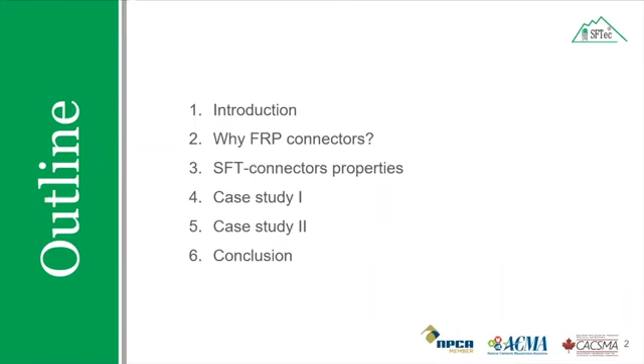Thank you, Rick, for the brief introduction. Let's start with today's presentation. It is a very short webinar on the introduction to fiber reinforced polymer connectors. Through this presentation, I will give a brief overview of the properties of SFT connectors and its applications, and I will go through 2 case studies to elaborate its present uses.

Before starting our main presentation, I would like to introduce our company, SFTec. Our products are mostly designed in Canada and manufactured in China by Sandok Industries Co. Limited, who are specialized in manufacturing of fiber reinforced polymer products. We work with national and international engineering firms, helping them through the design process with fiber reinforced polymer design standards, whether in Canada or the United States. Our focus is on parking facilities, water treatment plants, retaining walls, mainly made of glass fiber reinforced polymers, and also carbon strap applications.

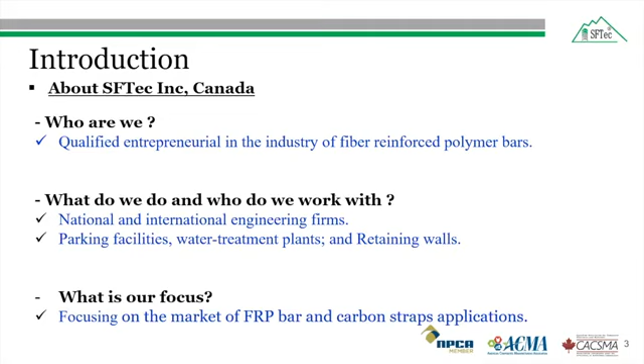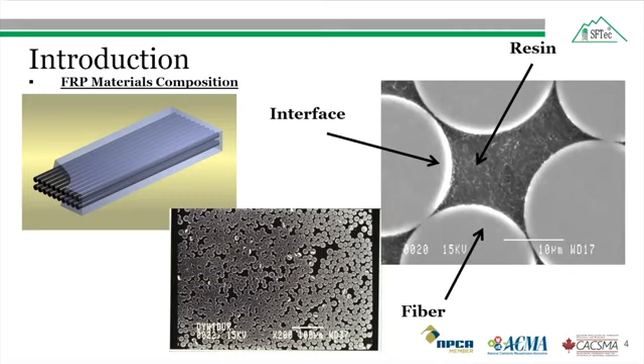The SFT FRP bar is made of composite materials, either fiberglass or carbon fiber. It is manufactured by a process called pultrusion, using a mix of recycled fiber and resins. Here the figure shows a microscopic view of the FRP bar.

There are 3 different types of fiber reinforced polymer bars available in the market. Actually there are 4, but I am presenting only 3 here: carbon, aramid, and glass. The 4th one is basalt, on which research is still ongoing. The stress strain plot shows how these FRP bars compare with steel bars. Two points should be noted: first, glass fiber reinforced polymer has lower strength compared to the other 2 FRP bars; second, the strength of all fiber reinforced polymer bars is higher than steel bars. However, their behavior is linear elastic up to failure.

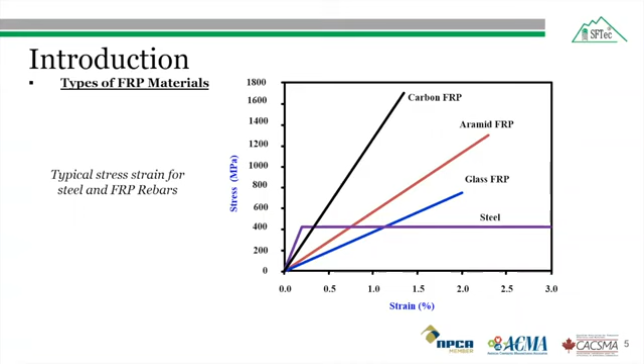In our products, we have different types of FRP products depending on project requirements. Some of the FRP bars we produce are straight bars, spiral and stirrups for transverse reinforcement, bent bars, and glass fiber reinforced polymer shear connectors, which is the topic today. Glass fiber reinforced polymer bar is widely used due to its production cost and better tensile strain compared to other FRP bars. That's why most of our products are made from glass fibers.

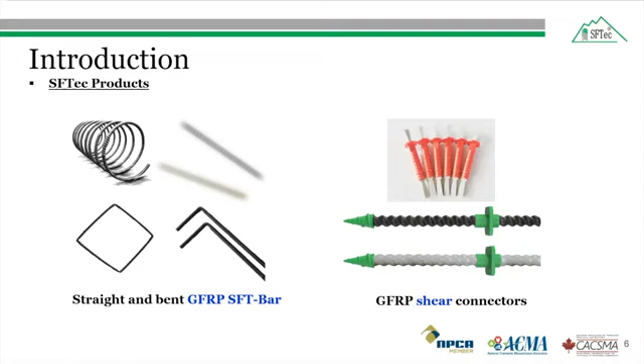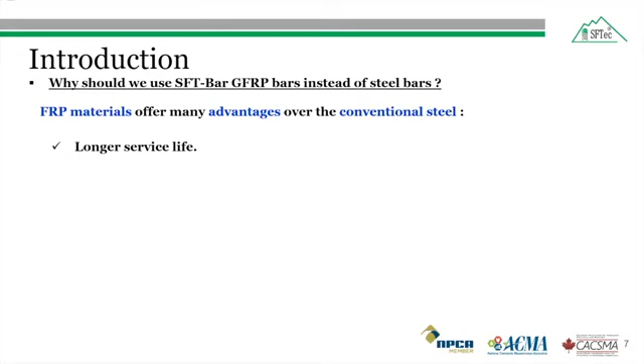Some of the advantages of the SFT glass fiber bar over conventional steel bars: it has a longer service life because of its corrosion resistance, therefore improved durability in harsh marine environments, such as construction near coastal areas in North America's cold climate.

The FRP bars have better resistance against corrosion compared to the steel bars. As I told earlier, the tensile strength of the FRP bars are 2 to 3 times more than that of the steel bar. However, FRP bars are lighter due to the low density compared to steel bars.

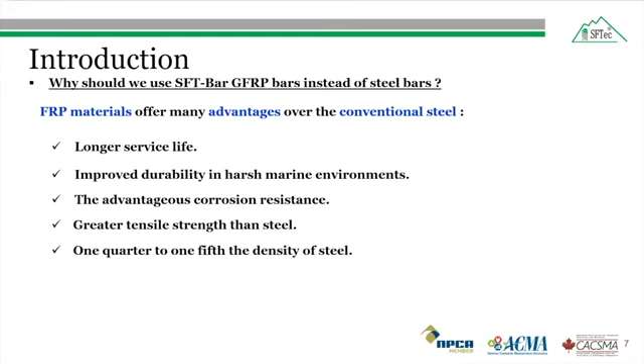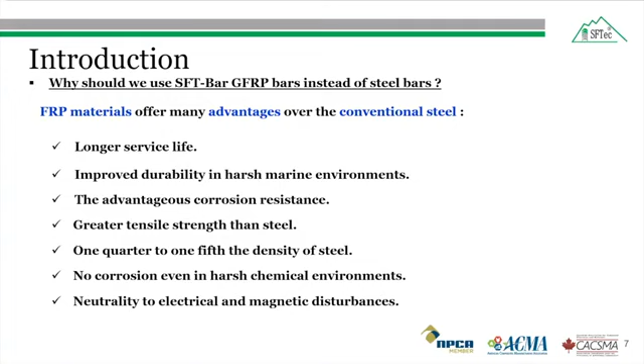Due to the corrosion resistance, FRP bars are good for harsh chemical environments as well. And they are neutral to electrical and magnetic disturbances, making them useful for applications such as airports, military applications, MRI rooms, and hospitals.

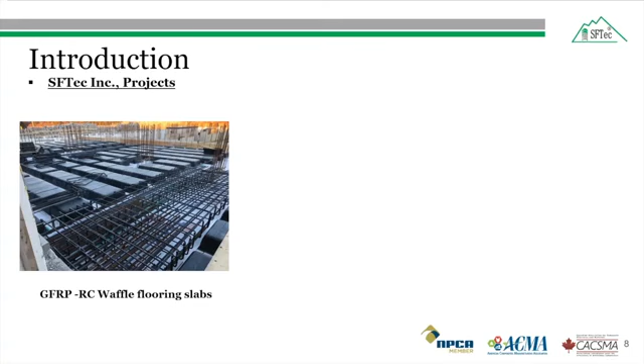Some selected field applications of SFTec FRP bars we have already done in Canada include a GFRP reinforced concrete waffle flooring slab designed with SFTec glass fiber reinforced polymer bar, built last year in Halifax, Nova Scotia. It can also be used for slab on grade. It is a non-structural slab and not a one-to-one replacement, but it saves a lot of money compared to steel bar in terms of labor and transportation.

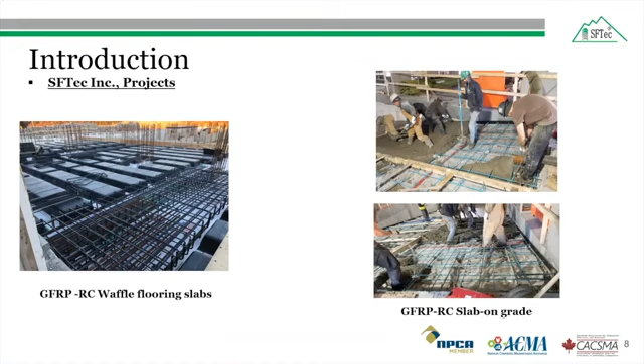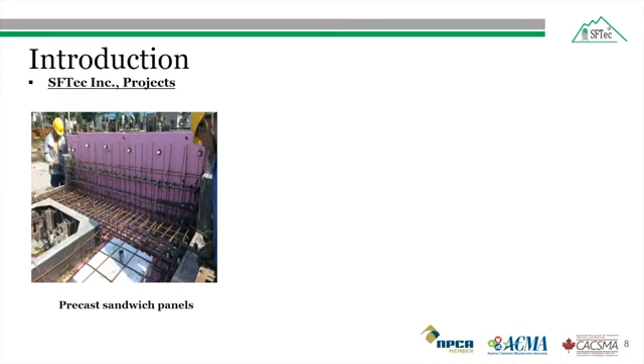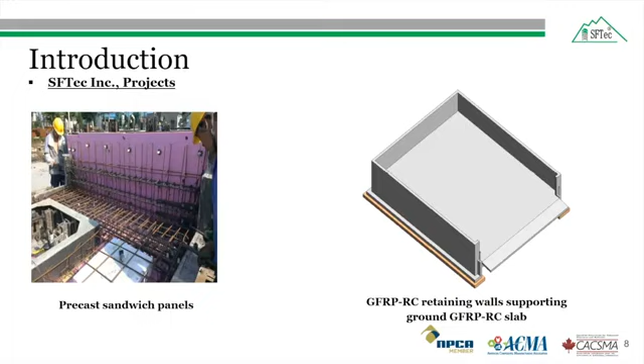On the right is a retaining wall built for the city of Montreal. The retaining wall is designed to dump snow with de-icing salts during the winter. So they built this retaining wall with SFTec glass fiber reinforced polymer bar, which provided resistance against the chemicals used in the de-icing salts.

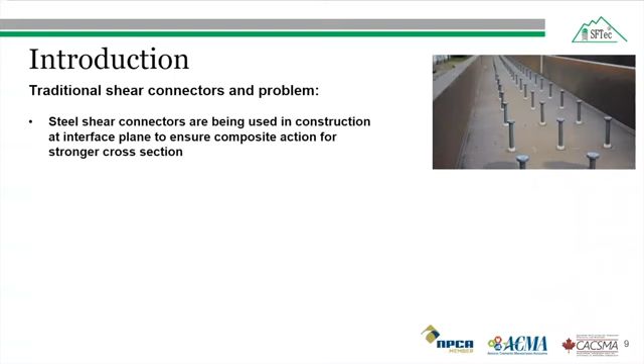Traditional steel shear connectors are being used in bridge construction, also generally called studs, at the interface plane between the cast in place deck slab and the precast girder to ensure composite action for a stronger cross section. But as we know, in North American countries, as the bridge deck slab corrodes over time due to environmental conditions, these shear connectors also corrode and will need replacement.

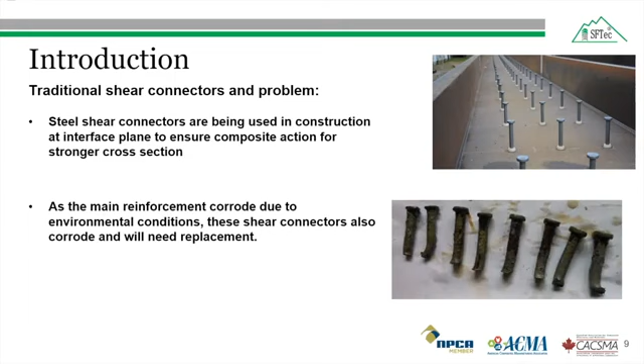This is especially true in Canadian winter, where de-icing salt is used. The corrosion of these steel shear connectors results in gradual loss of the composite behavior and strength of the composite action. So fiber reinforced polymer connectors have shown to be an effective alternative to conventional steel connectors due to their resistance against corrosion.

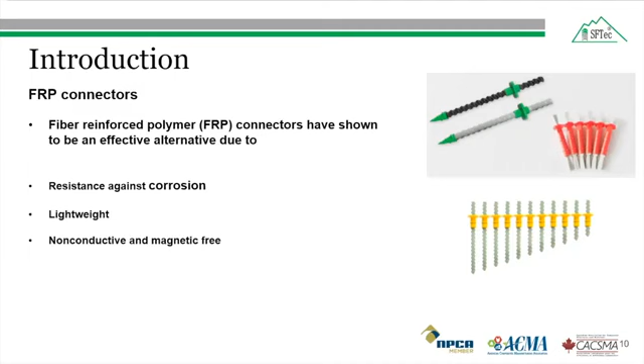It is lightweight and also non-conductive and magnetic free. We'll discuss why the non-conductivity of the FRP is helpful. With SFTec connectors, we have generally 3 different types of connectors.

The type 1 connector is the SFTec thread connector, which has a tensile strength of 700 megapascal, 180 megapascal shear strength, and tensile modulus of 65 gigapascal.

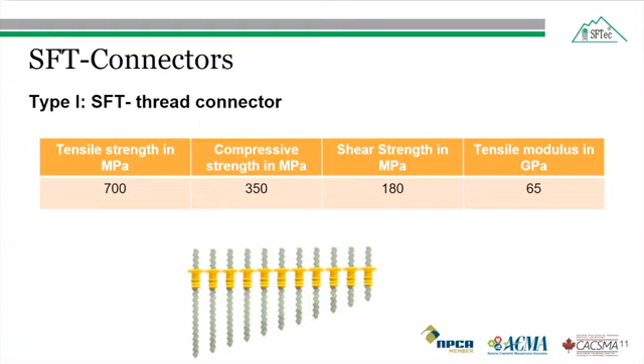The second type of SFT connector is the SFT flat bar, with tensile strength of 600 megapascal, shear strength of 120 megapascal, and tensile modulus of 45 gigapascal.

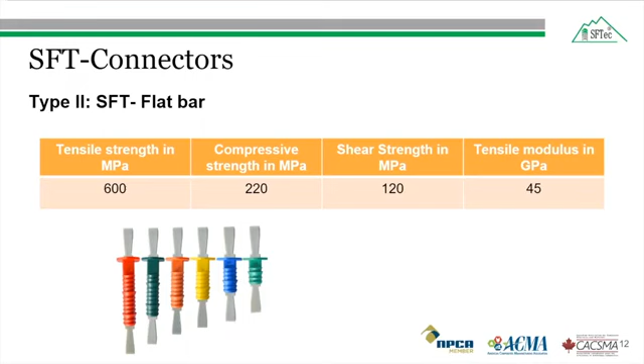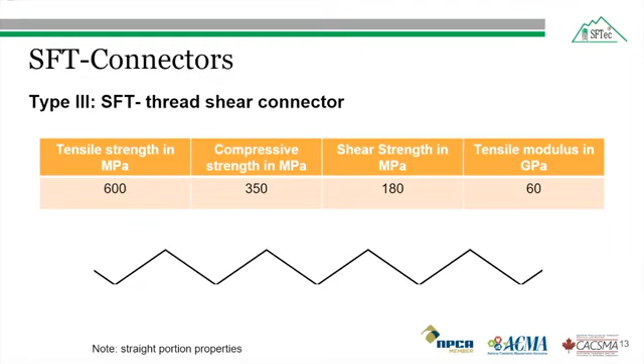Finally, the third type is the SFT thread shear connector, which has a tensile strength of 600 megapascal and tensile modulus of 60 gigapascal. Its structure is like a truss. It is worth mentioning that all the SFT connectors are made up of fiberglass.

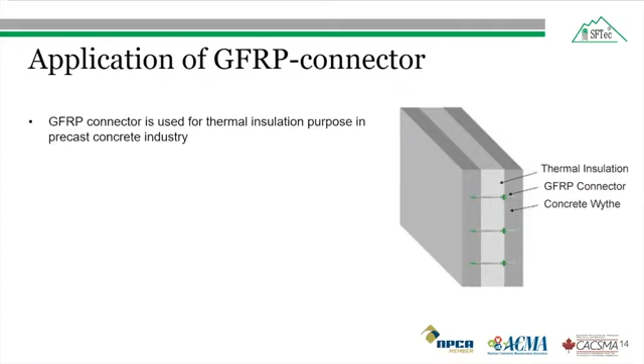The GFRP connectors are used for thermal insulation purposes in the precast concrete industry, such as plant precast and cast in place projects. The precast concrete sandwich wall is composed of an inside layer, outside layer, and thermal insulation. The thermal insulation is generally between the 2 concrete wythes.

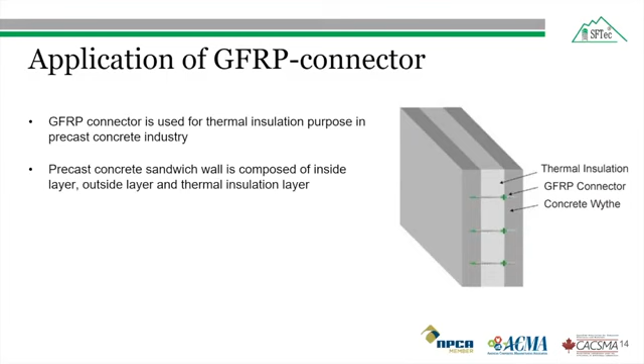And the FRP thermal insulation connectors are used to connect these 3 layers, and they not only bear the weight of the insulation and outside layer, but also can bear the wind load, earthquake load, and other kinds of loads.

There are two cases presented today. One case deals with the thermal resistance of GFRP connectors, and the other with the shear capacity.

The first case study is about the experimental investigation of thermal properties of insulated concrete sandwich panels with fiberglass shear connectors. Increasing economic and environmental costs of space heating and cooling have generated renewed interest in improving the thermal resistance of building envelopes. At the same time, rising construction costs are driving designers to select prefabricated elements, which can be constructed with higher quality control and in less time than traditional construction.

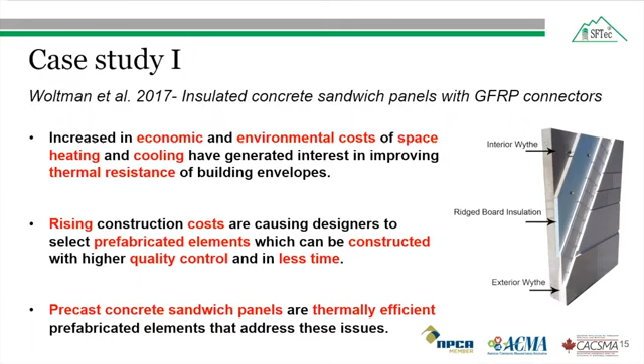Precast concrete sandwich panels, also known as insulated concrete walls, are thermally efficient prefabricated elements that can address both needs. Steel connectors are widely used in the industry, but also have the highest thermal conductivity of the connector materials available. Concrete is also used to connect the wythes in full composite panels; however, a large area of concrete is required, which creates a large thermal breach.

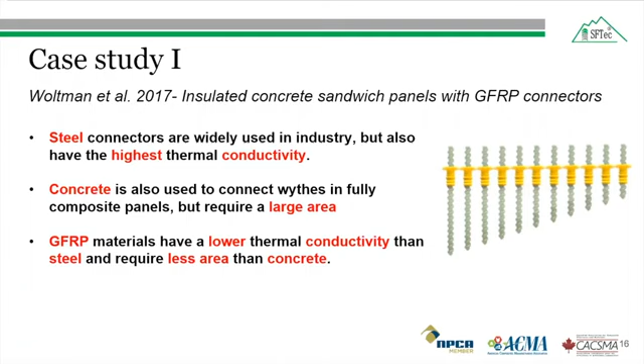Over the past two decades, rising energy prices have encouraged the development of alternatives to traditional steel reinforced design. Glass fiber reinforced polymer, or fiberglass, materials have significantly lower thermal conductivity than steel, generally ranging from 1/60th to 1/30th that of steel, and require less bearing area than concrete to hold the two wythes together. In case study 1, the test setup was a hot box apparatus used to determine the thermal behavior of the insulated concrete sandwich panel.

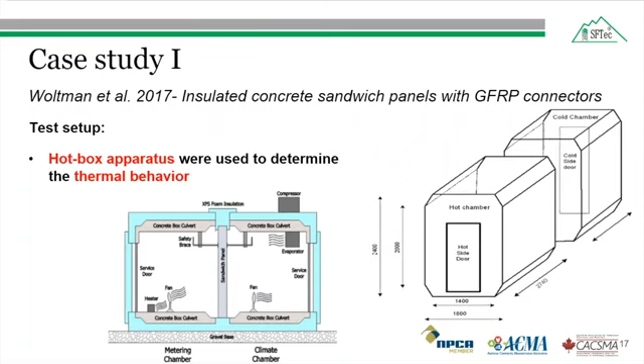The back of each chamber in the hot box apparatus was left open to allow the test panel to be installed. This figure shows how the test panels were installed inside the hot box.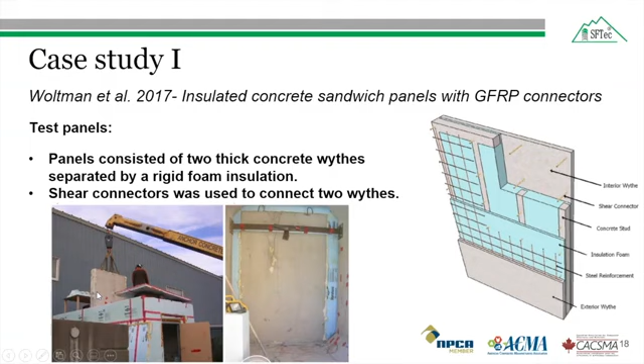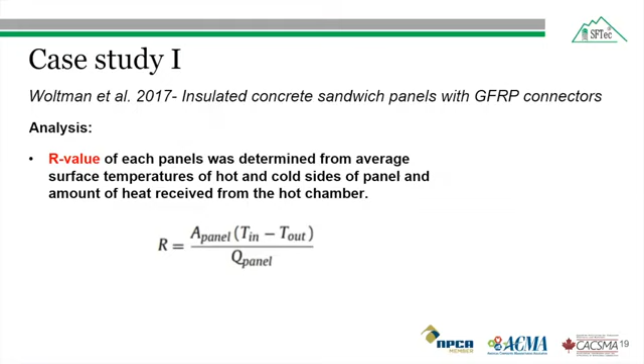The thermal resistance, or R-value, is the ability of the insulation material to resist heat flow. The R-value of each specimen in square meter Kelvin per watt can be determined from the average surface temperatures of the hot and cold sides of the panels and the amount of heat received from the metering or hot chamber. In this equation, A panel is the area of the test panel, T-in and T-out are the surface temperatures facing the hot and cold chambers, and Q panel is the heat received by the tested wall.

Now coming to the results from case study 1: two panels were constructed with similar numbers and dimensions of shear connectors, one reinforced with steel connectors, the other with GFRP connectors. The GFRP, or fiberglass shear connector, panels were found to provide equivalent or better thermal resistance than the steel connector panels, due to the lower thermal conductivity of glass fiber reinforced polymer compared to steel, which minimizes the effect of thermal bridging.

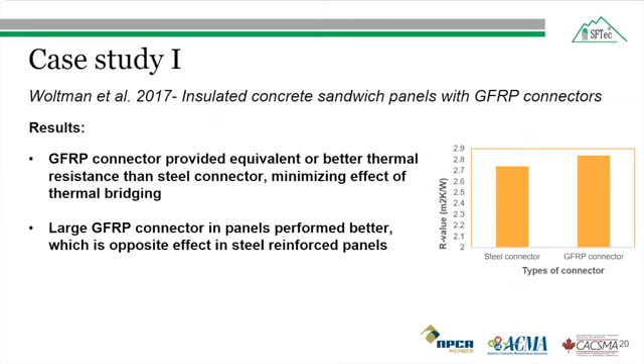The other conclusion drawn from this study was that the large glass fiber reinforced polymer connector panel resulted in a 60% increase in thermal resistance compared to the control panel, which is the steel panel reinforced with steel connectors. This result is the opposite effect of what we expected for steel reinforced panels, as increased connector area of the steel would lead to more thermal bridging.

Now the second case study talks about the in-plane shear behavior of insulated precast concrete sandwich panels reinforced with corrugated GFRP connectors. As I told earlier, insulated precast concrete sandwich panel systems are widely used commercially due to their economic advantages and superior thermal and structural efficiency.

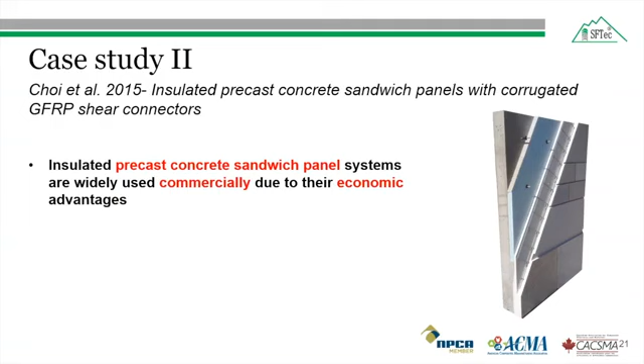As discussed, the panel consists of exterior and interior precast concrete panels separated by a layer of rigid foam insulation. The presence of the insulating layer enhances the thermal efficiency of the precast concrete sandwich panel system. The two discrete thin concrete wythes help resist applied load by changing the shear transfer mechanism of a conventional concrete wall panel. The figure shows the glass fiber reinforced polymer shear connector that incorporates a 45-degree angle to the shear plane and is 5 millimeters thick.

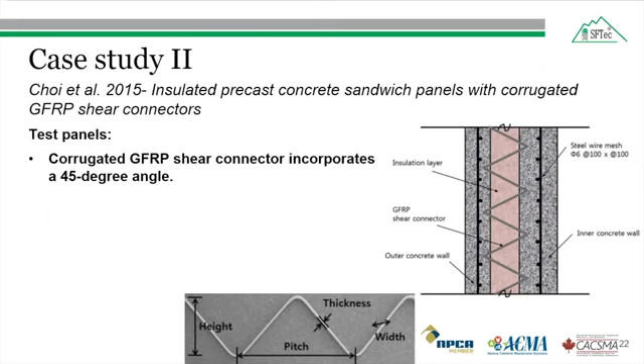A variable of the GFRP connector was used to investigate the toughness of the glass fiber reinforced polymer shear connector, varying its pitch, height, and width. The specimens were supported vertically at the bottom edges of the two concrete outer wythes on steel blocks. A displacement rate of 5 millimeters per minute was used for the specimen.

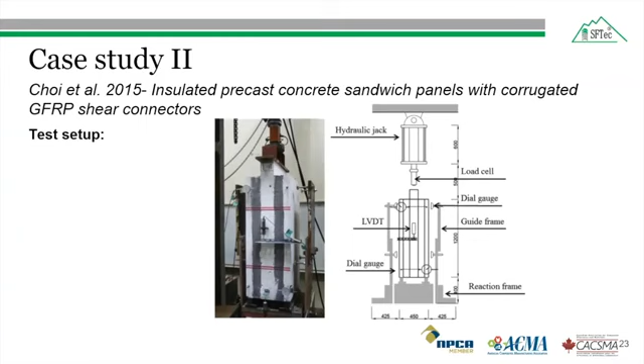A vertical load was applied through the load cell and steel block in line with a 1000 kilonewton hydraulic jack to the top surface of the inner concrete wythe to produce direct shear force across the interfaces. The failure mode after the test showed the strength of the panel reduced after maximum loading, followed by failure of the shear connector, and shear cracks in the insulation and delamination of the concrete and insulation were observed.

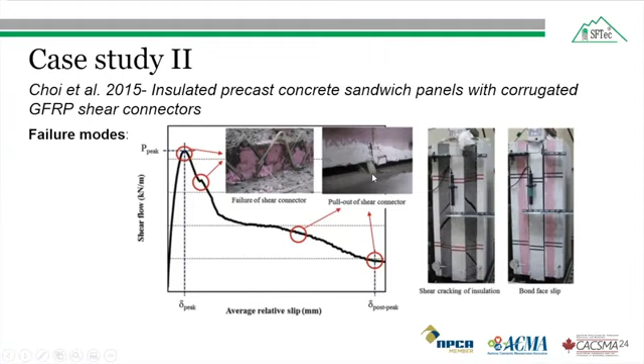As the rate of displacement increases, the load gradually decreases. The specimen failed with pullout of the shear connectors when the embedded length was not long enough.

The results from case study 2 were that the increased width variable of the GFRP connector, used to investigate toughness via its pitch and width, showed that an increase in the width of the corrugated GFRP shear connectors tends to increase the stiffness and strength of the specimen. With increase in pitch, the in-plane shear strength increases, resulting in higher tensile strength of the shear connectors.

So from these two case studies, we found that in the first case study, the thermal resistance of GFRP connectors is better than their steel counterparts. Even with an increased or larger size of GFRP connector used, it will provide better thermal resistance compared to steel connectors.

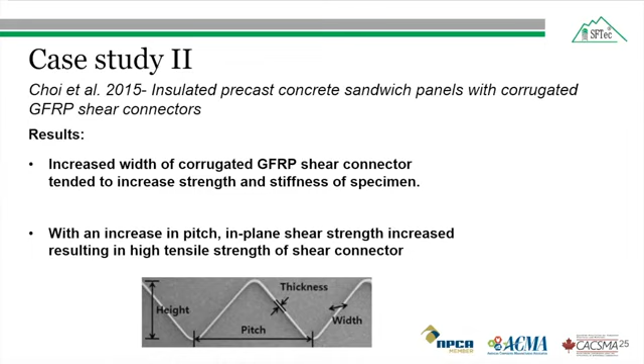In the second case study, the shear strength of GFRP connectors provides better insight into how much pitch, width, and height of the GFRP connector should be used in the precast sandwich wall so it can provide sufficient shear strength. As I told earlier, we have 3 different types of SFT connectors which can be used for different construction projects, like insulated walls, slabs, or precast elements, and these bars can be modified according to the project requirement.

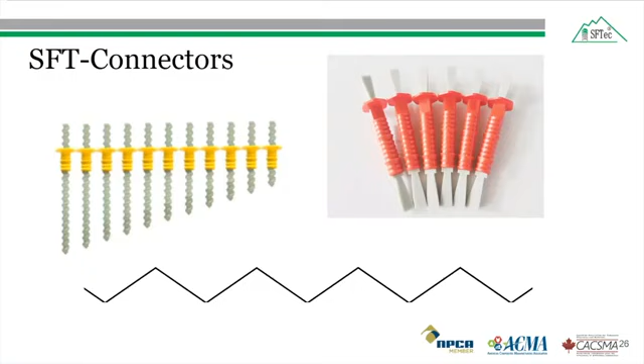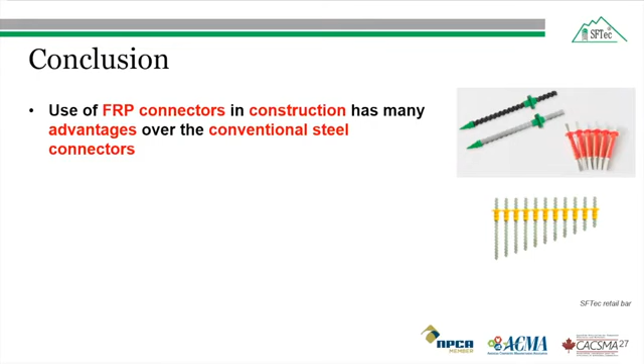So in conclusion, due to the corrosion resistance, lightweight, and magnetic-free nature of FRP connectors, they can be used in construction, replacing conventional steel connectors. GFRP connectors in precast insulated sandwich panels can provide equivalent or better thermal resistance than steel connector panels, due to the low thermal conductivity of GFRP compared to steel.

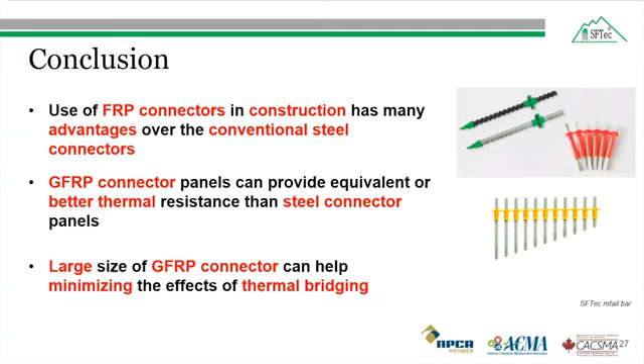And finally, the large size of GFRP connectors in precast insulated panels provides better thermal resistance, which is the opposite effect of what would be expected from steel connectors, as increased steel connector area would lead to more thermal bridging. Thank you very much for your kind attention.